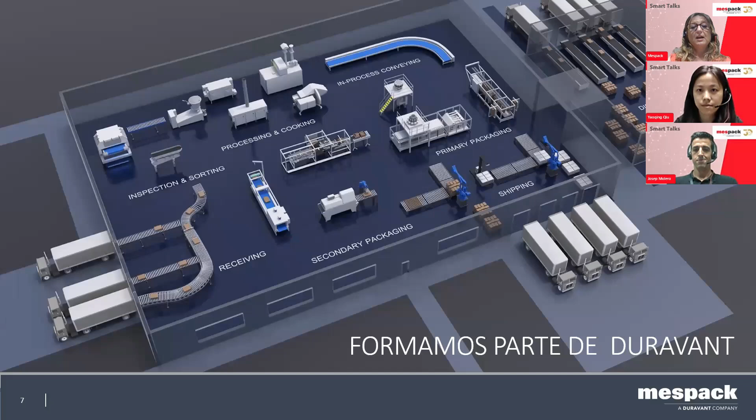We are known for our innovation and creating sustainable packaging solutions. Mespack has been part of Duravant since 2015, a leading player in the world of industrial equipment headquartered in Illinois. Duravant is a global engineered equipment company with manufacturing, sales, and service facilities throughout North America, Europe, and Asia.

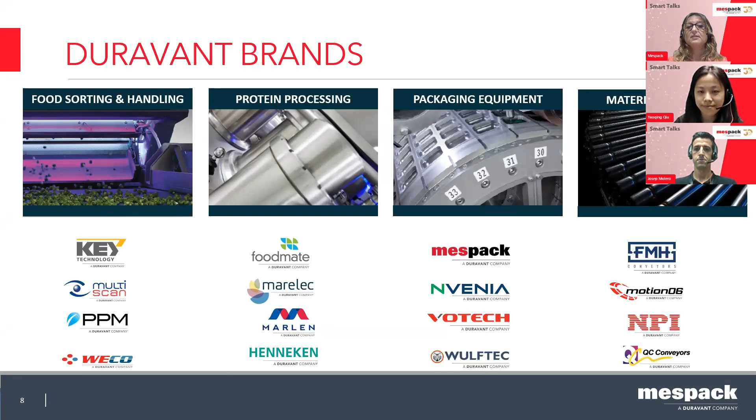Here you can see the different brands that are under the umbrella of Duravant, which offers immediate and lifelong aftermarket support across different sectors, serving food processing, packaging, and material handling industries worldwide through its diverse portfolio of operating companies and brands.

About Mespack: established in 1994 as a horizontal form, fill, and seal manufacturer, and has evolved into a global one-stop shop with intensive services.

With a sales team in over 90 countries and regional service centers ensuring prompt access to parts, we boast the industry's largest product portfolio. With 380 employees across 17,700 square meters of facilities, our production centers are located in Spain, US, and India.

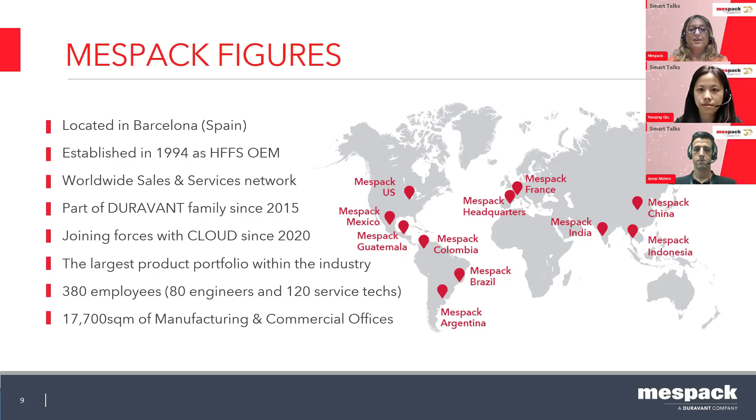As Mespack, we provide solutions for various industries, including food, beverage, pet food, pharmaceuticals, personal care, and home care. Additionally, we serve different industries such as lawn and garden, agriculture, tobacco, automotive, and more.

In terms of our portfolio, our talented engineering team designs customized integrated solutions for primary, secondary packaging, and end-of-line processes. With our extensive portfolio, we offer high precision, efficient, and versatile horizontal form, fill, and seal machines for flexible packaging, including machinery for pre-made pouches and a wide range of vertical form, fill, and seal equipment.

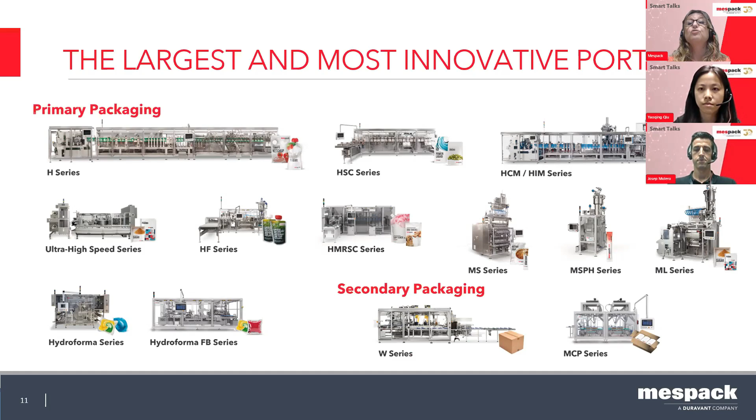Additionally, we provide hydroforma machines for water-soluble pods and end-of-line equipment to fit your secondary packaging needs, offering turnkey solutions if it's needed.

Last but not least for this introduction, I want to say that at Mespack we are committed to sustainable packaging solutions that prioritize environmental responsibility. Our focus is on developing monomaterial packaging options which are easier to recycle and reduce waste. Through our Innovation Center in Barcelona, we collaborate with different key partners of the industry to create together new eco-friendly packaging solutions tailored to meet specific needs while promoting a more sustainable future.

This marks the beginning of our introduction to Mespack, providing you the opportunity to familiarize yourself with who we are. And now, Yao, I pass you the floor. Thank you.

It is especially focused on pharmaceutical sector. The 2 on the right, ML and MLC series, are specially designed for sachet. ML is a standard sachet machine that we have in our portfolio since so many years ago. Today we want to highlight our new machine, MLC series, as mentioned before, Monica. This machine we launched this year at Hispack trade show in Barcelona city. This is a high-speed solution for sachet, which is able to operate up to 150 cycles per minute.

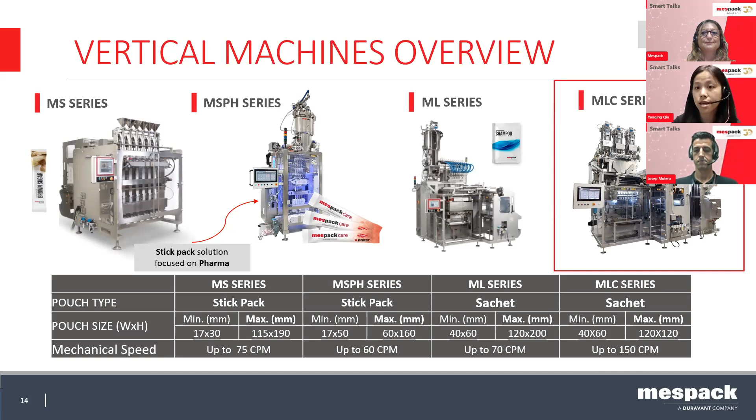As I mentioned before, this is a high-speed machine which is able to operate in continuous motion. This is a special feature of this machine. As a standard, the electrical cabinet is integrated into the machine, but it can also be independent as optional if needed. Here we have an overview of this machine.

On the right part of the machine, we can see there are 2 unwinder modules. The one in the middle is a standard unwinder module, and the one on the right is a special unwinder for auto splicing in order to avoid machine downtime. These 2 unwinders, if needed, can be reduced to a single module to reduce the footprint of this machine.

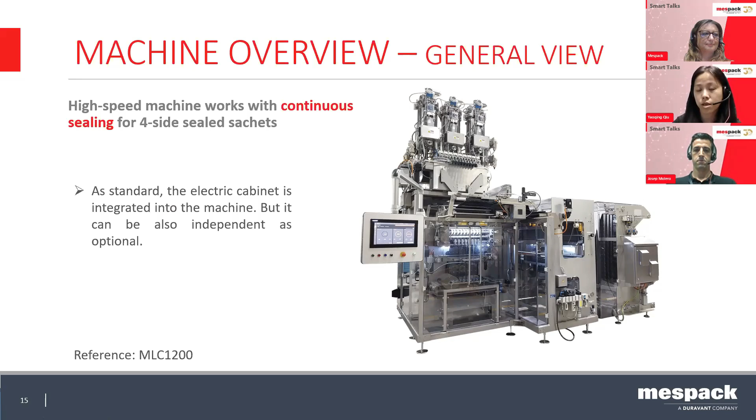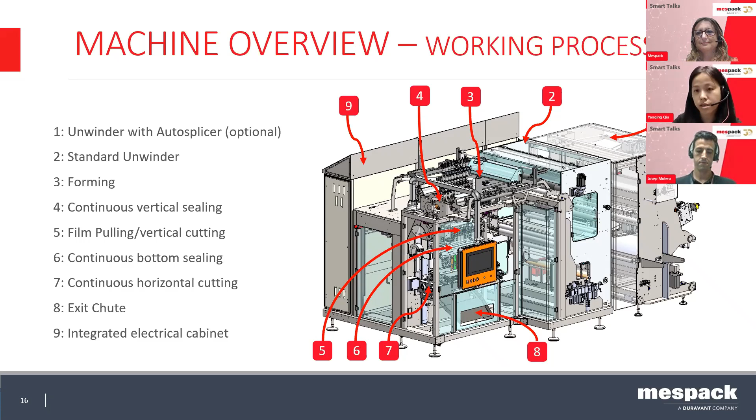This makes this machine able to operate at a higher speed. Finally, we have number 8, the exit chute of the sachet. As I mentioned before, number 9, the electric cabinet, is integrated into the machine as a standard feature.

In this page, we have a small summary of the technical specification of this machine. We have 2 different models, 1000 and 1200. The difference between these 2 models is the film width. MLC 1000, the maximum film width is 1000, and MLC 1200, the maximum film width is 1200.

The footprint is the same for both machines, and it can be reduced in length as I told before. Another big difference between these 2 machines is the pouch width range. We can operate a bigger range with the MLC 1200, up to 130 millimeters. It can be discussed if you need a wider width.

Another difference is the maximum lane numbers. With the MLC, we can operate up to 14 lanes. So it means we can have higher production with this machine.

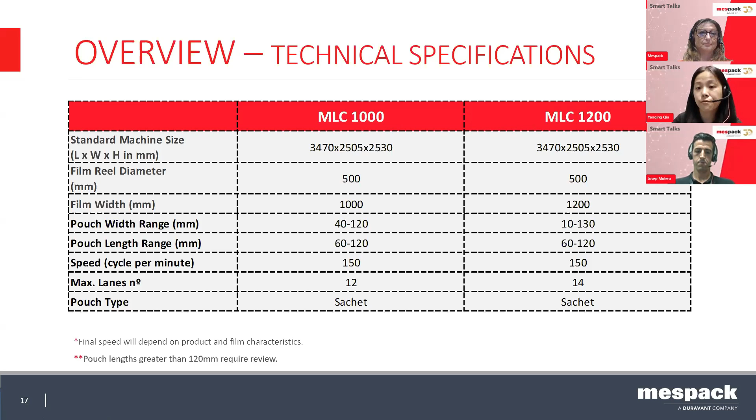About the pouch type, this machine is able to operate with sachets with a tear notch, sachets with round edges, and also string sachets with different numbers of pouches. If you want 5, 10, it's always possible with this machine.

So the next topic is machine highlights. I would like to give the floor to my colleague Josep. Please, Giuseppe, go ahead.

Thank you, Yao. Thank you for the overview. Thank you, everyone. I would like to highlight the MLC capabilities. Basically, we try to break down the topics as much as possible, and at the end of the presentation, if you have any doubts about the system, please let us know. Let me move on.

As Yao mentioned, we developed a high-speed machine. Considering the 4-side seal flat pouch, we can reach around 2,100 pouches per minute, based on 14 lanes, and based on the trial that has been done here in our innovation center. This is not a theoretical value.

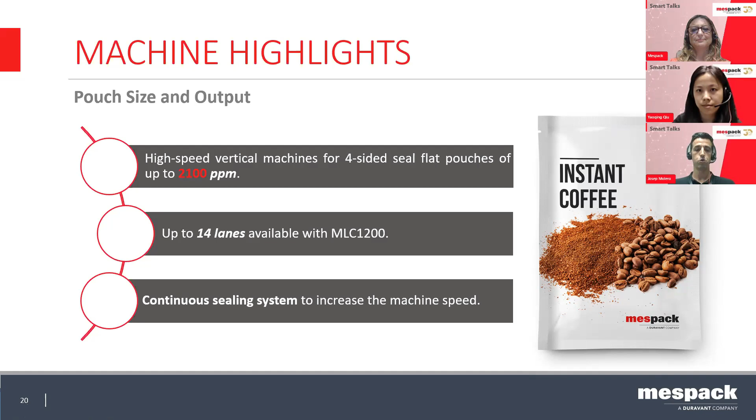This is a value that we already achieved, and we are already capable of proving to our customers that we can achieve these speeds. We have the evidence, and we can invite our customers to come here to the workshop, in the innovation center, in order to feel this innovation. If we are talking about the frame, we have a key partner for a lot of suppliers where we have a lot of high requirements in terms of maintenance, and we have TPM requirements meaning the machine is fully open.

Okay, we can see the machine almost 360 degrees during the operation. It means we don't have black areas. We can control the machine from outside, and we can inspect from outside during all the process.

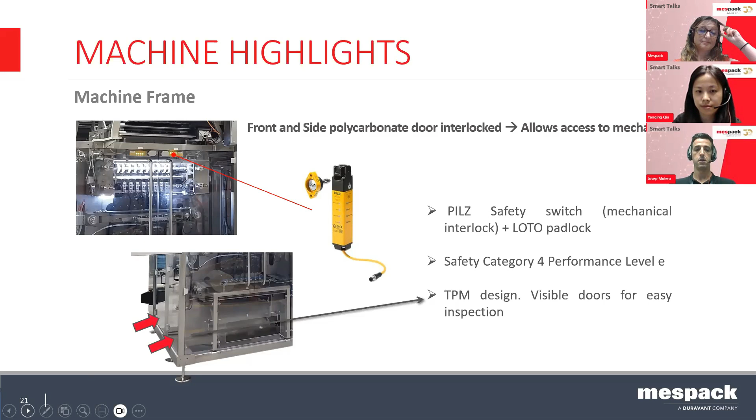The machine, for us, safety is a key point. Our machine has the highest standard rates on safety, with a safety category 4 with performance level E. All the safety switches have a mechanical lock to make sure the machine should be stopped and remove all the residual energies prior to open the guards and inspect.

I would like to also start from the back side of the roll. We are starting with a single roll. As Yao mentioned, we have 2 machines ready, 1000 and 1200. 1200 is the maximum capability based on the benchmark of the laminate suppliers.

Bigger than these rolls is difficult to find in the market, and this is the reason the limitation is still in 1200. We have the laminate control the web by servo motor, in order to control the pulling and to prevent stretching since from the beginning.

The shaft where is built up the roll will be an expandable shaft with controlled pressure always. That means we can guarantee that the shaft is always inflated, even if someone forgets to inflate it in the beginning.

We have a splicing table as a standard. This means the machine should be stopped for changing the roll, but we can show you later also that we have the capability to never stop the machine, with auto splicing.

The unwinder is designed for a huge range of printers, laser, inkjet, or thermo printers, whatever. We have enough space to allocate all of them. In order to control the stroke of the laminate, we have an independent pulling servo motor in the unwinder that allows us to control the web tension, control the stop position, and guarantee that the laser and the inspection will always be consistent.

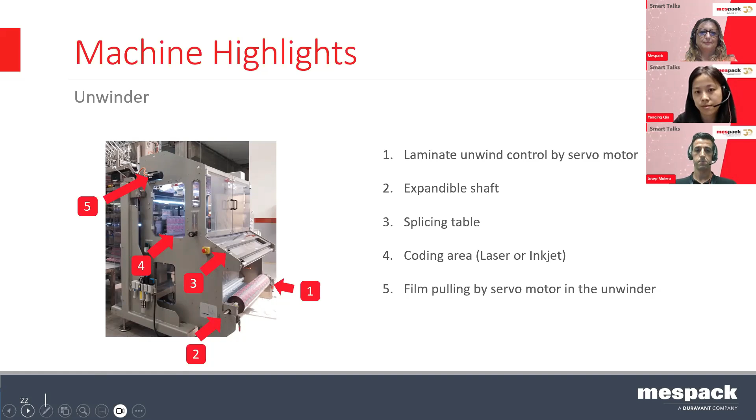As we mentioned, the auto splicing unwinder is an optional. We have a collaboration with a key partner on the splicing units. It's a Butler, located on the rear side, allowing us to not stop the machine for any change of the roll. This increases the productivity of the machine, avoids downtimes, and increases performance significantly, avoiding the 5-10 minutes for stopping and changing the roll.

This one we have in both versions, 1000 and 1200. The image we have here is without safety covers, only for presentation, but this area is also fully guarded. If the machine is in running mode, we can guarantee zero access to this area. We will only have access to change the roll.

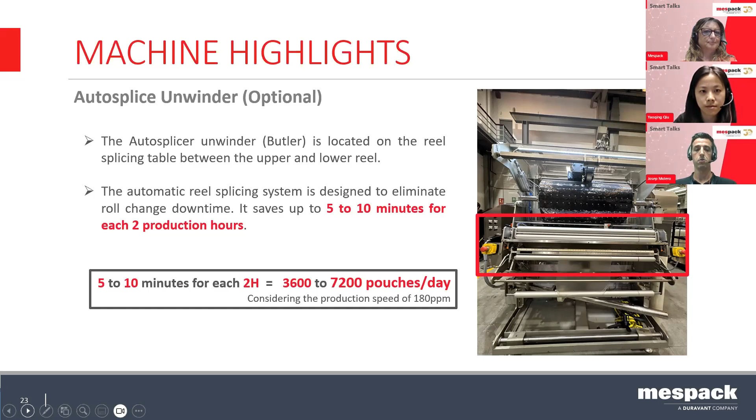Then if we start, for us it's quite important, we know the market every time requires more format changes. These kinds of machines in old generations have the complexity of a single format, but in Mespack we know the market demand is completely different right now. It's small productions and changeover as quick as possible, as efficient as possible. This is the reason we start from the triangle.

We divide the laminate into 2 sections with a single blade, but we have an innovation where we can control the triangle position by HMI, and select which format should be done. It will be allocated depending on the laminate width and the format to be done, allowing us to change over as fast as possible.

And the machine concept is designed always like this. Everything is designed with a Poka-yoke system in order to change the parts quickly and faster. We have the circular, and then let me show a quick video.

This is how to form the vertical seal. In the vertical seal we also have an innovation—we know that monomaterials are very sensitive to temperature, so we designed the system to be able to open the rolls when the machine has unplanned or planned stoppage, to avoid the laminate being burned.

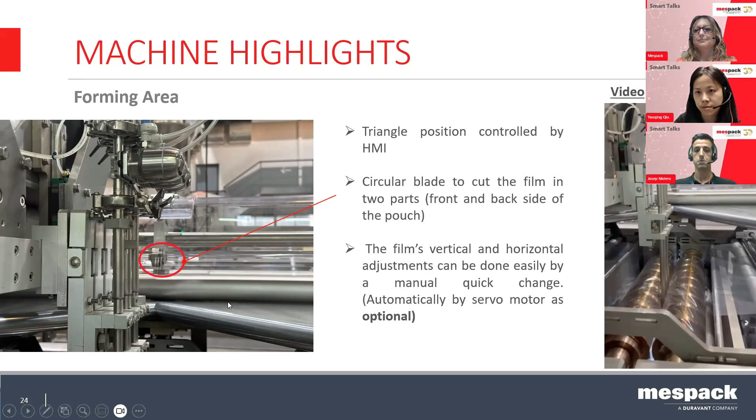If we move to more deep details on the triangle, we have the triangle here. Again, for these photos we don't have any covers, but consider that the laminate web is always covered, especially when working in the pharma or food industry. That is one specific requirement—we can guarantee no laminate, no contamination on top of the machine.

Even also, we are able to provide different capabilities like laminate flow, etc. But keep in mind, these photos are only to try to be more representative in this video, and also to be more clarifying on the insides of the machine.

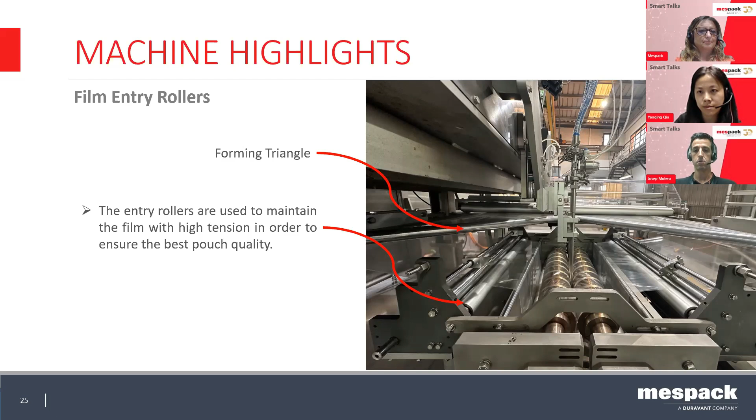The vertical seals is the difference with our ML standard series. It's a continuous motion, and we have rollers. These rollers also have the capability to have a quick changeover, and also to change the width.

The pouch, as mentioned, this machine is capable to manage a huge range of width pouches, and we designed this machine so we can change over quite fast these continuous sealing rollers. The sealing rollers are manufactured in a special material, copper alloy, which allows us to guarantee between all the lanes plus minus 2 degrees Celsius difference, and it's also very convenient to handle mono materials, where the sealing window is quite small compared with conventional laminates.

The pressure of the jaws is also capable to adjust through the HMI. Basically, we designed the machine so 99% of the adjustments are through the HMI. We don't have, or we have very small amount of, mechanical adjustments. This is also related to TPM as mentioned before. We will be able to adjust everything from outside the machine and never stop the machine, to increase productivity.

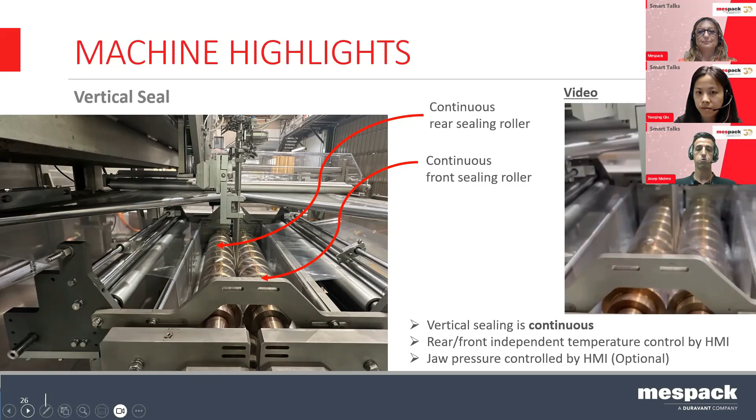If we move back a bit, after the vertical jaws we have the pulling rollers. The pulling rollers are also designed with a very soft material in order to guarantee that the serration of the vertical seals is maintained with the same pitch and same shape as the original one done by the rollers. The pulling rollers, again, we can also control the pressure by the HMI.

The pulling rollers are also designed to have a quick changeover. As I'd like to mention several times, the machine is fully designed to change over quite fast. We don't need to adjust the pass - we only remove the shaft, and immediately fit the new shaft with 2 pins, ready to start with the new format. The tear notch will be designed for continuous mode, a fixed tear notch, and we adapt it for all these formats, changing the position in length and also the position in width automatically.

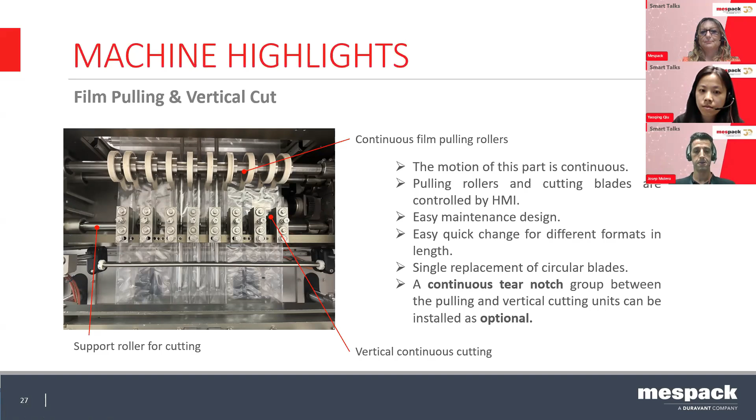In terms of horizontal seal, we have different presentations. The machine we have in our headquarters has horizontal sealing jaws with integrated cutting. However, we can also produce separate cutting. This allows us to achieve a high speed cycle, 150 to 180, in empty mode.

With the zigzag we can produce chain packages. Some of this presentation in the market, especially for Asia, we have a chain package where we can supply 10, 12, or a specific number of pouches with a perforation that the final consumer can later separate. The straight cut is also optional, will be below the sealing jaw, and will also be in continuous mode.

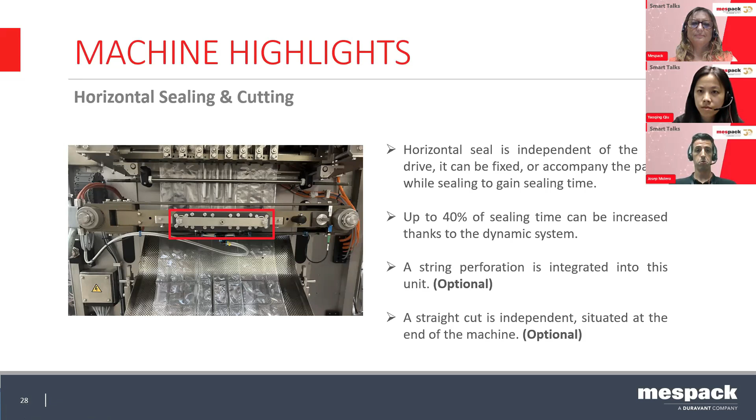As mentioned, one of the characteristics of mono materials is the sealing time, sealing window, and also the need for cooling in order to have a good cutting. We have developed blow air nozzles, but the key point is how we build up the air. We have an option for an air compressor, but we know the power consumption is always higher. We are also able to provide a turbine that builds up air at a certain temperature and reduces the need for air compressor utilities in the factory.

Also good to remark, all machines are driven by servo motor, except 1 or 2 pistons that act like a stopper of the knife. Everything is by servo motor, allowing us to precisely control the stroke at high speed.

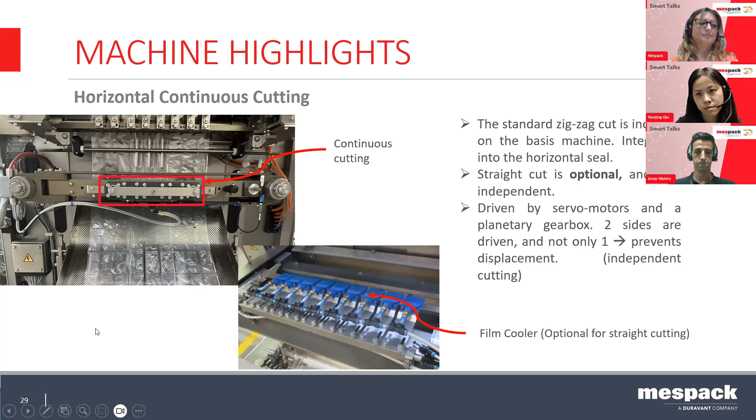The exit chute, we can customize. Normally we have a reject for entire lanes, but we are also capable of providing single reject lanes, even for strings - we can produce single pouches and reject them individually, or produce chain packets and reject if any pouch on the chain is empty. This also allows us to reduce machine waste, and can be combined with different types of counting and downstream systems that Mespack is also capable of providing.

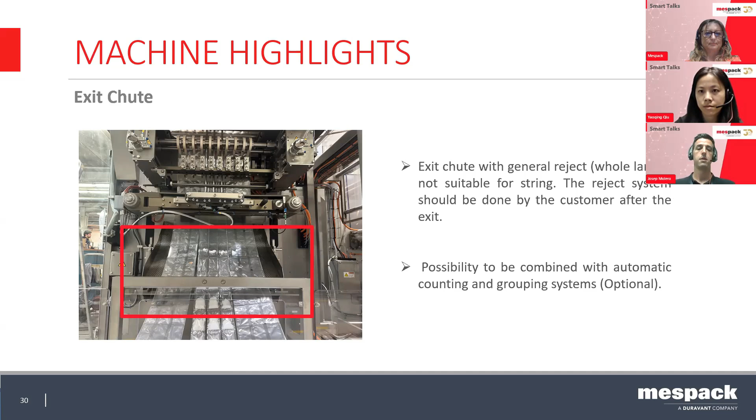Once again, cooling, as mentioned, is quite important. As remarked here, the cooling is quite important. Also, the vertical and sealing jaws are designed with a copper alloy, we call Elmedur - that's a brand Mespack uses as standard. We also have some know-how where this Elmedur can be applied with certain treatments that increase the resistance and lifespan of the components, and also have properties to avoid sticking, especially with mono PE.

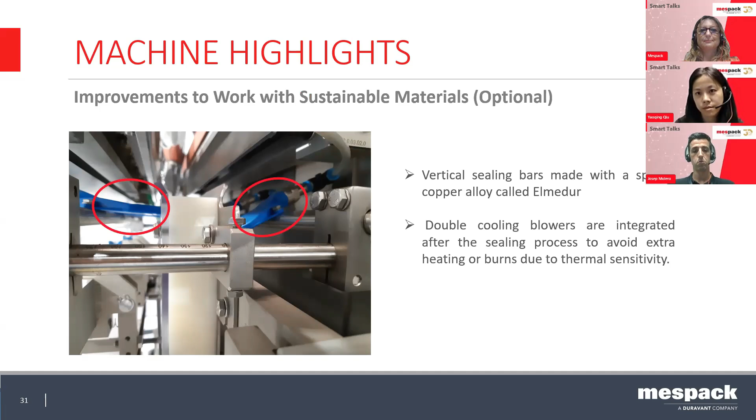Now that we have covered the overview of the machine, we'd like to move to the dosing system. We have high knowledge and a huge rich portfolio of dosing systems, which we can separate into two families: the auger filler and volumetrics.

This covers powder and food products, from coffee to milk. We can also produce for the pharma industry, with several machines that can fill these products. The other range is granules. We have a volumetric system capable of filling and fitting on these kinds of machines, allowing us to control this whole range of projects.

We again have TPM requirements. The hopper is fully transparent, so we can see all the time what's happening inside, how the product looks, if anything is changing color, check for separation or degradation of the components. We're able to see this online at all times.

Everything is controlled by servo motor. We can control the dose by the HMI, and also add a feedback loop with the checkweigher for auto adjustment in production. The target is always high precision filling accuracy below 3%, plus minus 1.5%. In specific pharma cases we achieve even lower values. We always need to consider the products from the beginning of the project, but we're able to guarantee this high precision even with small dosing.

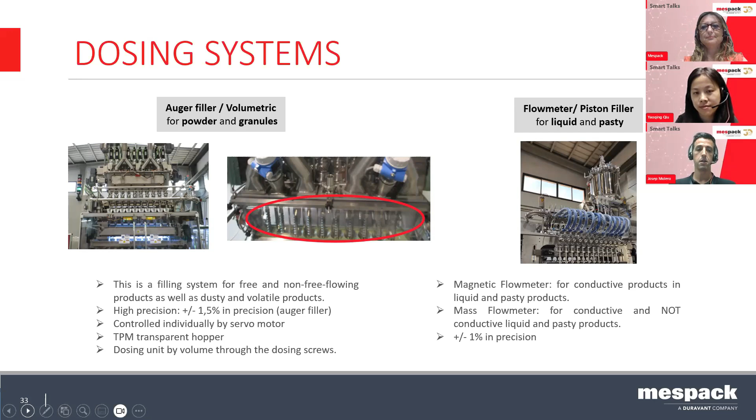I'd like to also share the industries, because the sachet, in the past, was more focused on food. But now, as mentioned, food is just one of the industries—we're moving into interesting areas like beverage, which was common in the past, but now pet food has increased a lot. We have a lot of demand for 3-4 side seal pouches for pet food, and we're already producing our ML series for these kinds of pouches.

For pharma, we have a lot of machine demand because these products require small dosing, small sachets, but also require high volume capabilities and downstream equipment that will pack these pouches, 5-10 pouches in a carton box.

Home care is quite traditional in Asia, where we have a chain of packaging with softener materials and softener products, using a single dose instead of the big volumes provided in other markets like Europe or USA. We're able to produce this on these machines at high speed output.

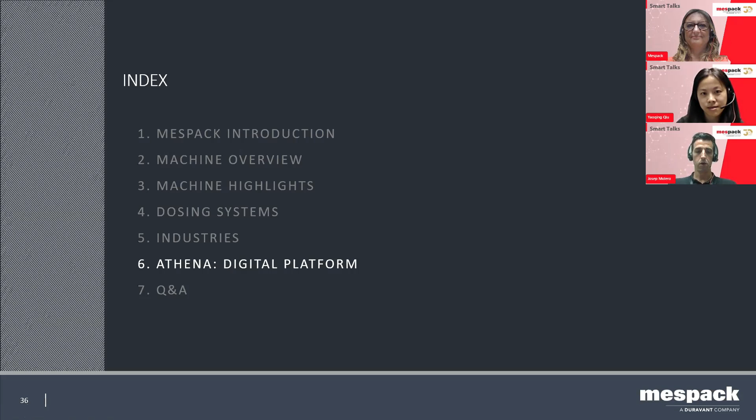All of this mechanical knowledge needs to be driven by something. We have a PLC, but Mespack also developed a platform called Athena. Athena is the digital platform installed on all Mespack machines since 2020. This allows, as the first benefit, all factories worldwide to have the same interface—meaning the machine in USA, Asia, or Europe, Spain, all have the same interface.

This means the users of the machine have the same knowledge, the same feedback, the same approach, and this guarantees that the ramp up and the knowledge of the interface are quite easy, especially when the customers have different factories around the world. After that, we can also explore a lot of information that will help understand unplanned stoppage. Nobody likes unplanned stoppage, but when it happens, it's good to have the data and to react to this.

This Athena platform will help us with this. Athena is a platform designed by Mespack, under control of Mespack, and we can share the information by cloud or on premise, meaning only shared inside the factory, helping everyone reduce waste. That is the major challenge in production areas, because when we don't have control of the information, we don't know how we can react and improve.

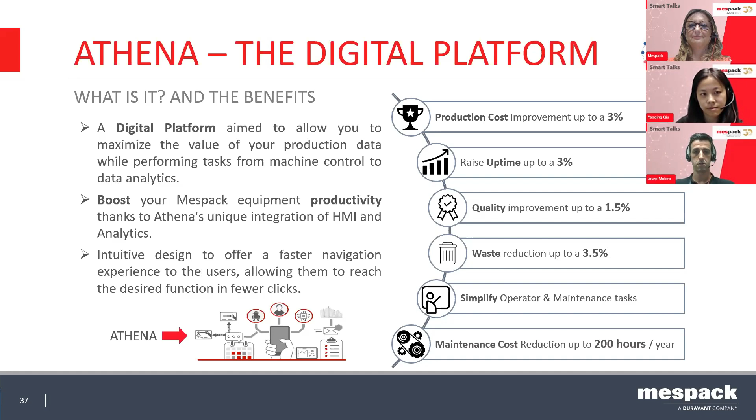Mespack also designed a new development starting this year called Hello Mespack. On the HMI, you will have a button that, if you need anything, the users of the machine can press and immediately call Mespack. We have a 24-hour service that reacts to the issue. We can connect online, see the machine, and help the users with everything they need.

As mentioned, Athena is a connectivity including the machine. We have designed the PackML architecture, and the PLC program is done on logic that is a worldwide standard.

The user-friendly design is amazing. We can select for each screen 1 or 2 buttons. We are friendly for the operators. We can select the machine for areas, and also customize for the users.

This means the machine will have the same interface, but the needs, for example in Mexico versus the USA, may be different for different processes. This can be customized for each customer and will help make the system better.

We can use all brands. Normally, we work with key partners Omron, Rockwell, and Siemens. Our standard is Omron, but we can adapt to all customer demands.

We also made an interesting point on the panel. We have a panel PC of 18.5 inches. This panel PC is also designed by Mespack because we found that in the past, with Omron, Rockwell, or Siemens, we were always linked to the delivery time of these suppliers. So Mespack developed a full panel PC of its own.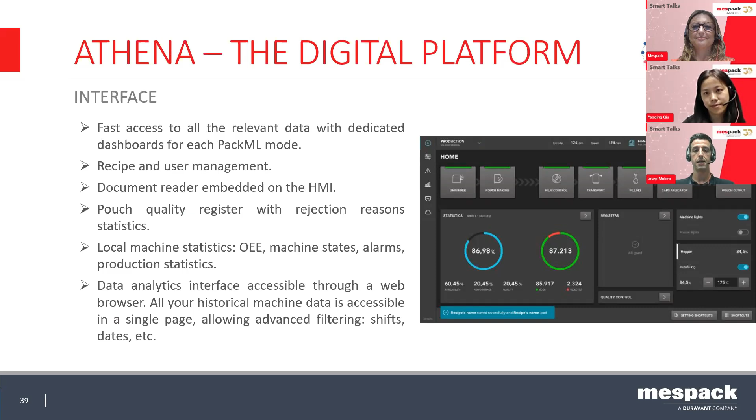Finally, we would like to show you a quick presentation. This is the video of our innovation center. These machines are fully ready to test with our customers. Let's watch the video and enjoy the MLC series.

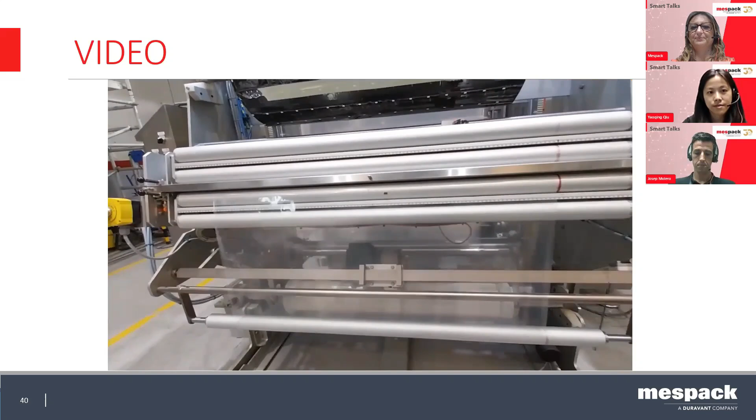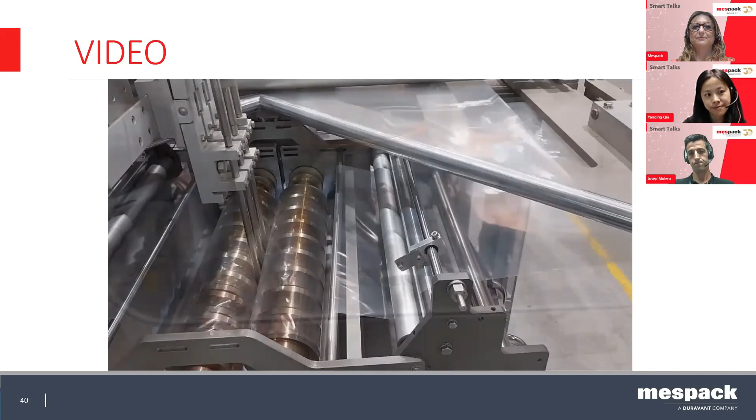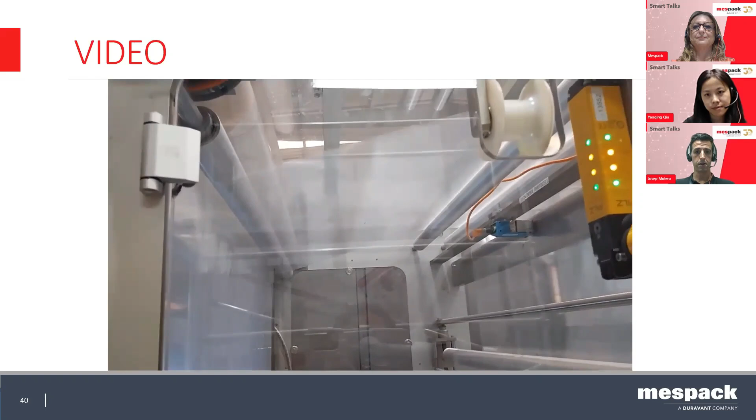Location of the printer - there's no printer on the innovation center unit, but we are ready to test it in case needed.

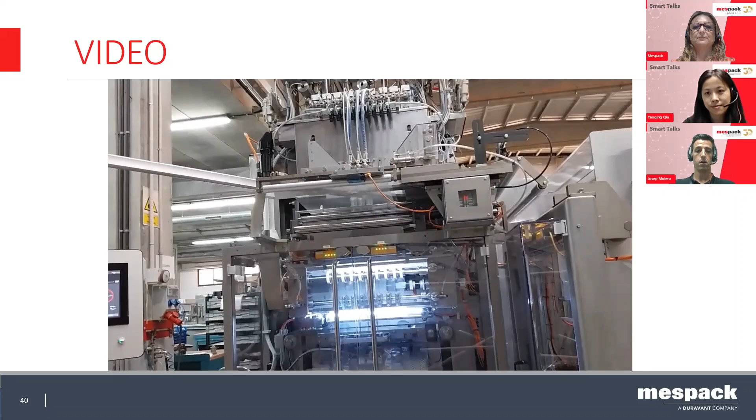For the filling, you will see 3 hoppers. This is not the standard configuration; it's because the test will be done for 9 lanes and 3 different flavors of the pouches.